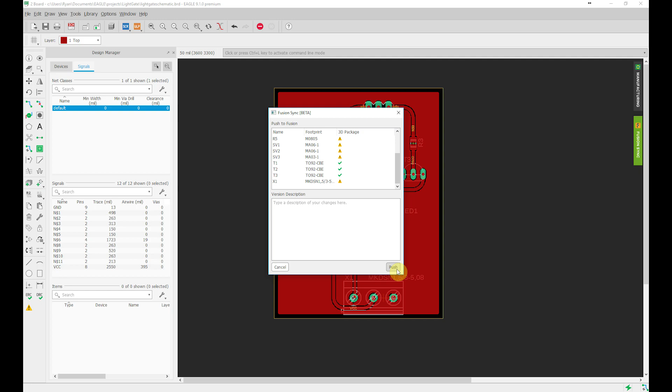Okay, so we'll start in Eagle, and for me, I've already exported this, so when I go over onto the right and click on Fusion Sync, it gives me these options of just simply pushing to Fusion. If you haven't done this yet, it'll ask you which folder within your Fusion folders you want to save it in. So just select that and then send it over.

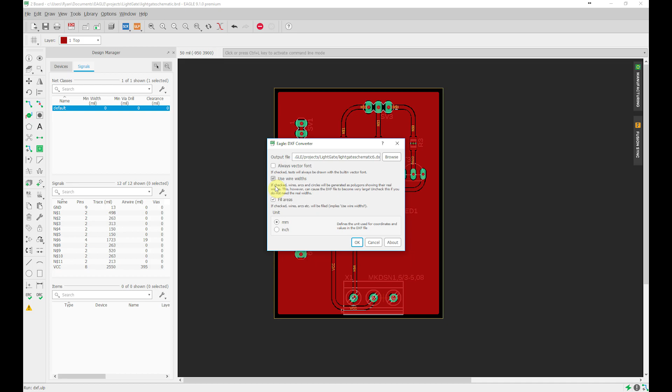And then there's one other step, which is go to File, Export, and the DXF. Take off the vector font and the fill areas, and OK. So those are the two things that we need to export.

Alright, so we get it open in Fusion, and you'll see the board is more or less populated already. This is pretty helpful if you want to design the rest of the, like the enclosure or other parts that you want to include with your design. For us, we just want to hide all of those components.

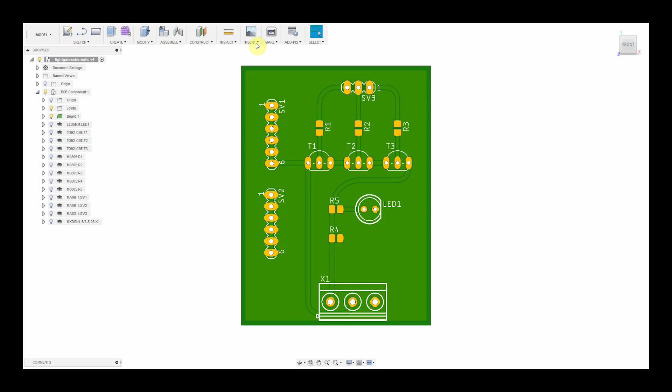Really, the only reason that we actually export the board itself is this gives us the holes. And the reason we exported DXF is it gives us the circuit. You see the circuit outlined here, but it's just an image, a rasterized image, so it's not going to allow you to pick out the paths themselves. That's what the DXF gives us. All right, so

we're going to put the DXF on top. So we go to Insert DXF, select our board, and select our DXF file, and then that'll take a little bit. And we want to take off all the different layers from Eagle that we don't need. In my case, I only need 1 and 17. And okay, this will take a minute.

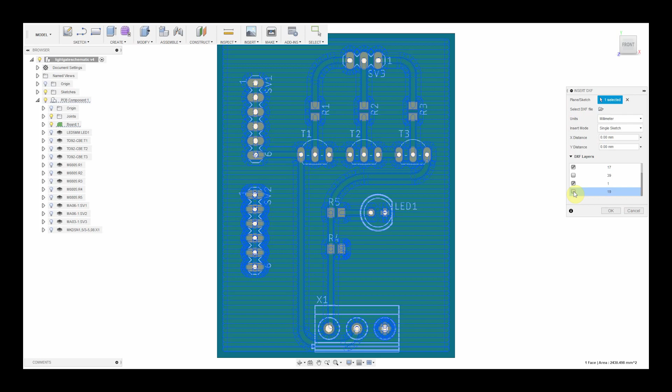All right, so now we have the circuit itself on top of our board, which you can see here. So what we want is the outline going around each of the different traces. And that's the path that we're actually going to cut out from our circuit board.

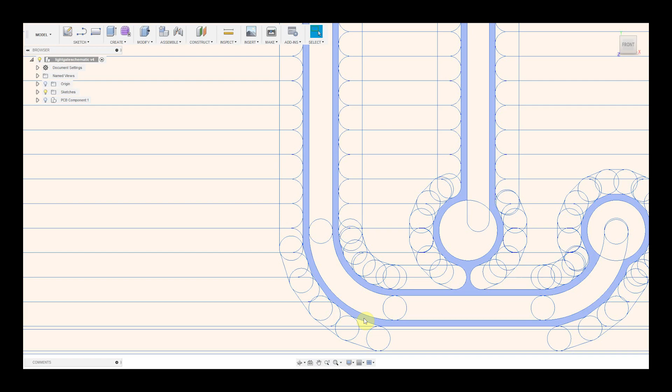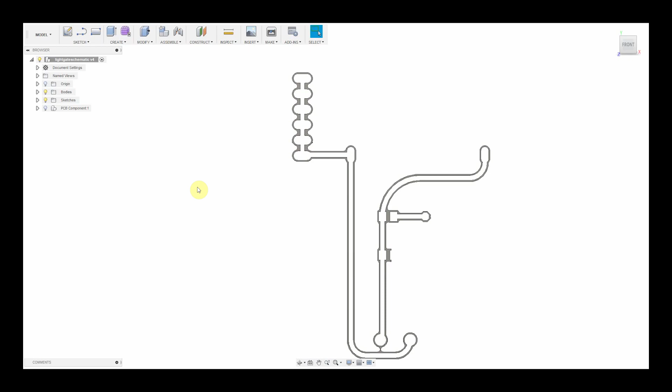So one thing you can do is just click on that path somewhere and extrude it. I'm going to extrude it negative because this is sitting on top of the board. Extrude it negative 0.1 inches. And that'll look like that. Alright, so then we just go through all the other components. This is a little bit tedious, so I'll speed it up.

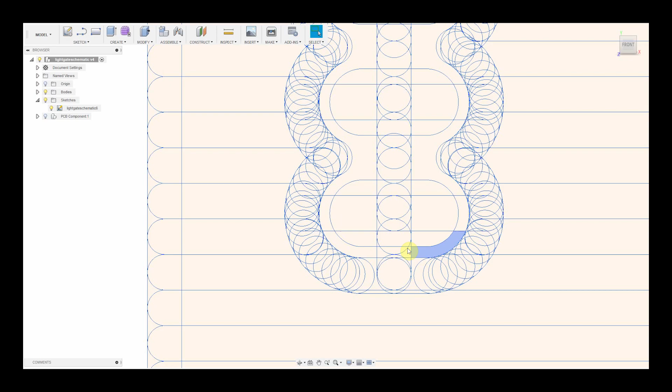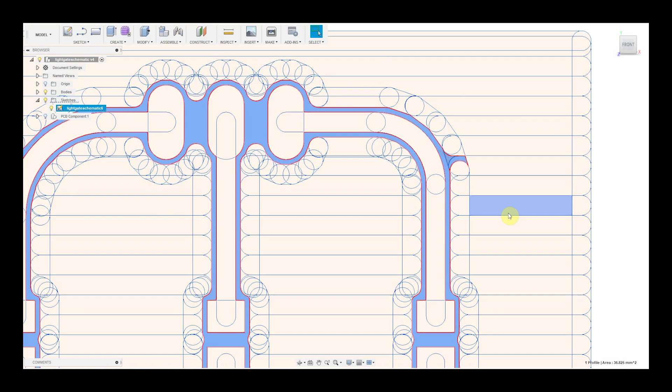One thing to notice, I'll stop here. So there's some bug, I don't know if it's in Eagle or in Fusion, that on occasion you'll get these, I don't know, there's areas that just don't work out right. So there's two ways you can deal with that. One is in the sketch workspace. If you just draw a line over those areas, that seems to sort of fix the bug. I don't know why, but that seems to fix it.

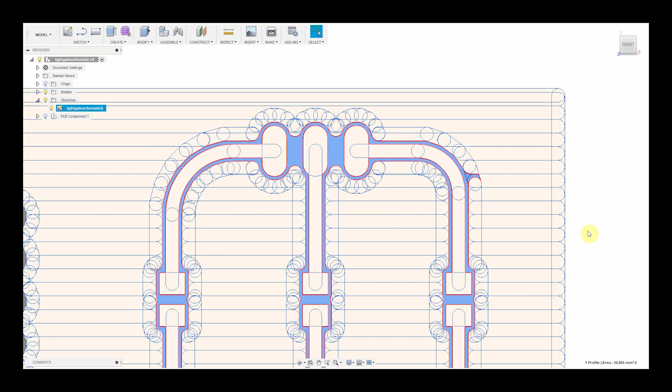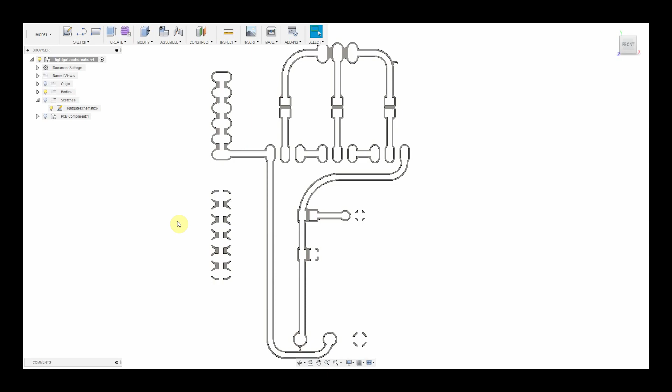If it's just a small one like this, there's another way to fix that. The problem with drawing a line over it is, in a lot of cases, it takes a long time actually. It takes maybe a couple minutes for every line that you draw. So there's a faster way, if you can deal with it, is just to continue as I'm doing here and extrude it as normal.

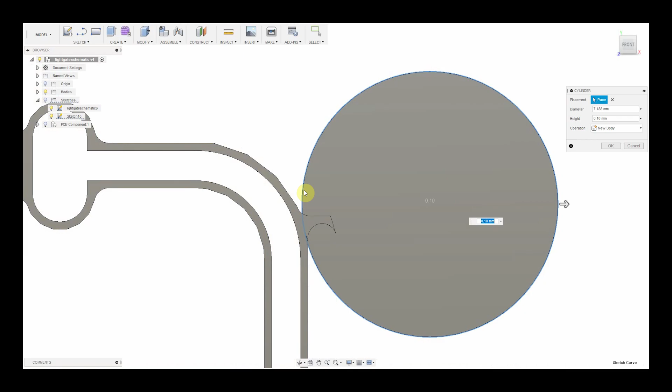So it all looks pretty good except for that one little spot, so we'll fix that. So I'll just draw a cylinder actually. And pull it through. Doesn't have to be exact. And just cut it. Alright, so that's close enough. That looks pretty good to me.

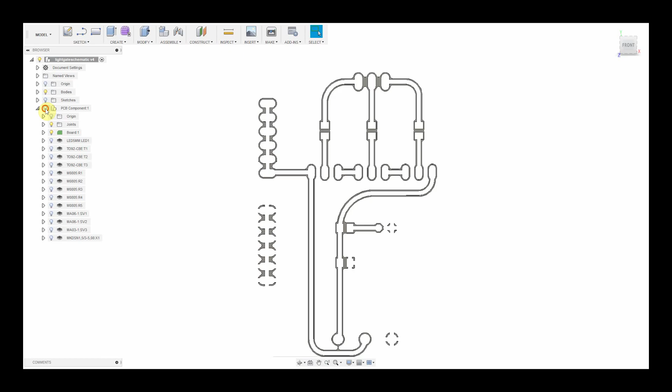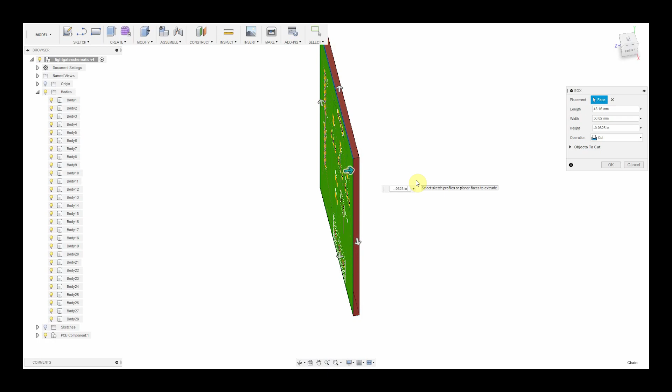Okay, so let's bring our board back. So the way we're going to do this is, because we only need the holes from the board that was exported directly, we'll just create another box that is the same dimensions as our board, and then do a combine and intersection to get the holes on our new circuit board.

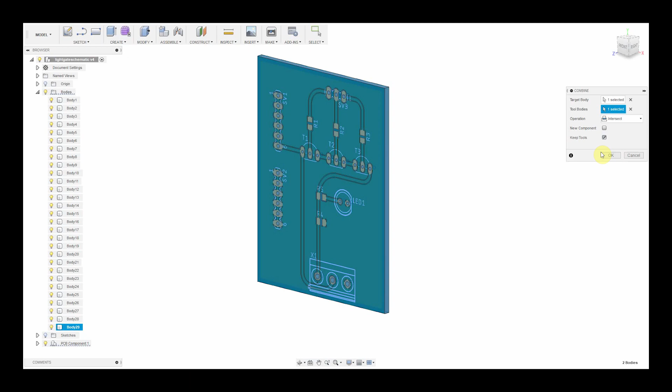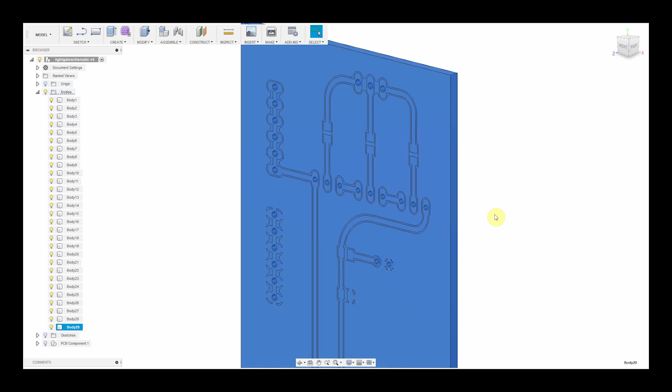So now I'll do the combine, intersection between our new box and the original board. And okay. Alright. So if we hide our board, we can see, so now we're looking at our board plus all of our extruded paths. You can just check it out, make sure it all looks alright.

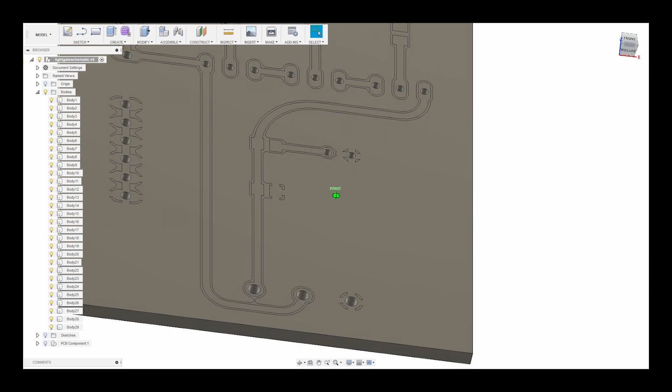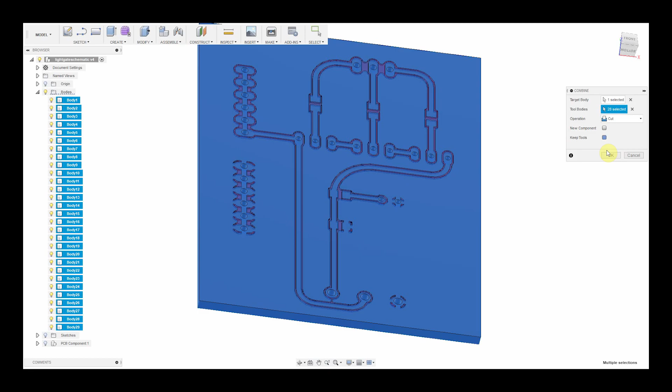Okay, so now we'll do a combine, select our board, and then select all our different paths, which is our circuit. Do a cut, and keep tools for now just in case we need them again. And click OK. Okay, and then we can just hide all those, so select them all and hit V. Alright, so now we should see more or less the circuit board that we want to cut out with CAM.

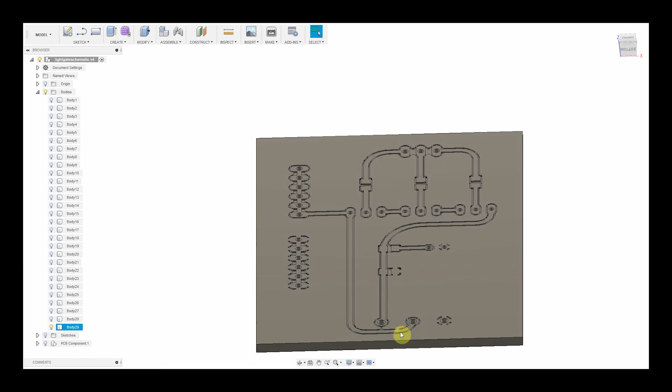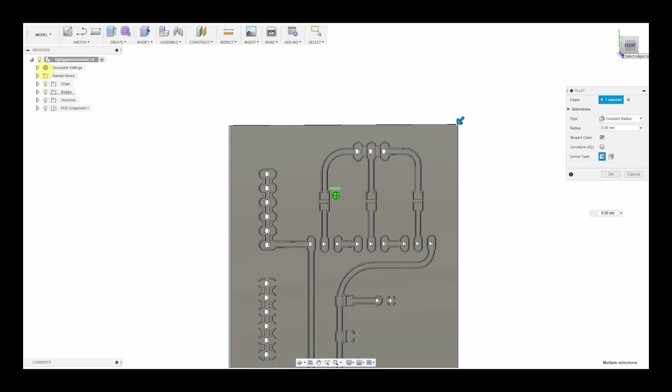One thing I'll do is add some fillets to the corners, just to make it look fancy. And let's go 2 millimeters. And let's do 3. Looks good.

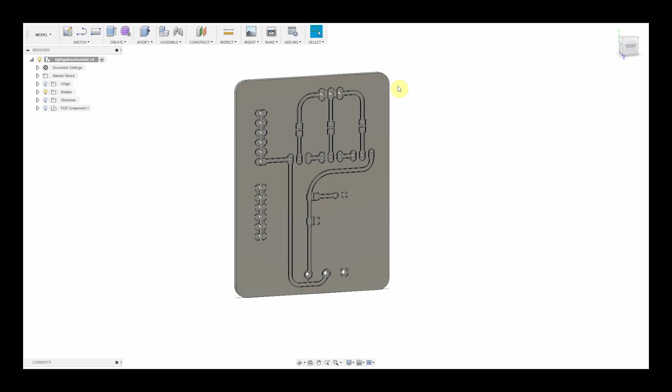Okay, now I missed recording this part of it. So to create the setup stock, I just created the stock to match the thickness of my board and to match the height and width of the actual board that I'll be cutting it out of. And then you can put the origin wherever you'd like. You can put it in the center as I'm showing here. Actually, what I did is I put it in the bottom left on the top corner. I mean the bottom left top for the front surface.

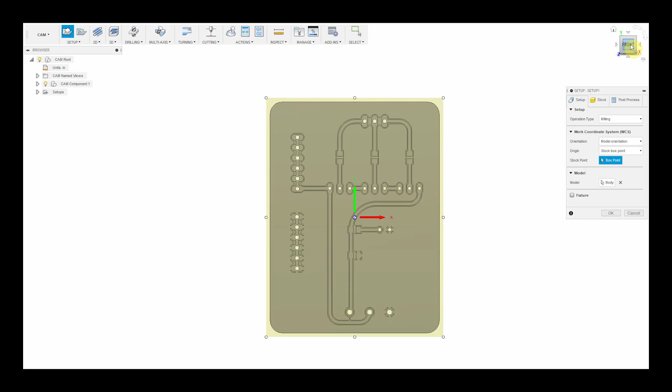What I'm doing here is check what the distances are, the thickness of the surround for your traces, and in my case it's 0.008 inches. So I'm using a V-shaped bit with a 60-degree included angle, and this is a little bit of a trick. Using the V-bit, the engraving bit, with Fusion is not so convenient. So what I do is I lie to Fusion and I tell them I'm using a square bit that's of a particular diameter.

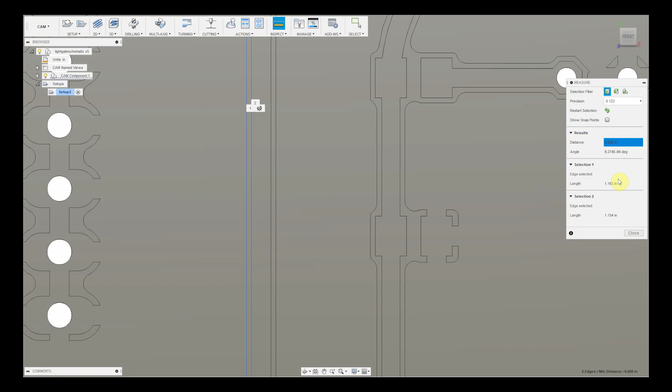And so, since the whole width of the cutout that I want to do is 0.008 inches, I'll say that my V-bit is actually a square bit that is like 0.006 inches. So I'll go make this tool. I'll call it my faux V-bit. With a flat end mill, just call it 2 flutes. And go 0.006 inches. And then just make the rest of it sort of look reasonable. Doesn't really matter.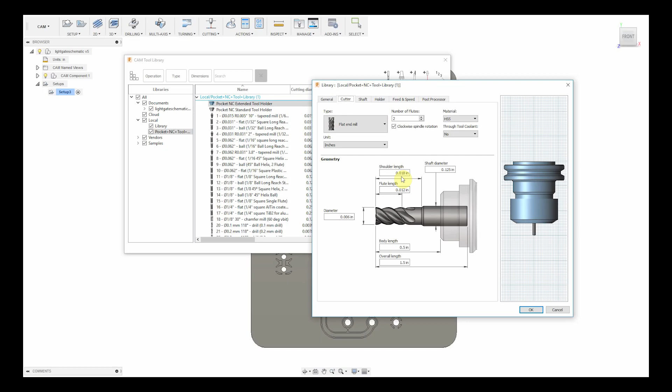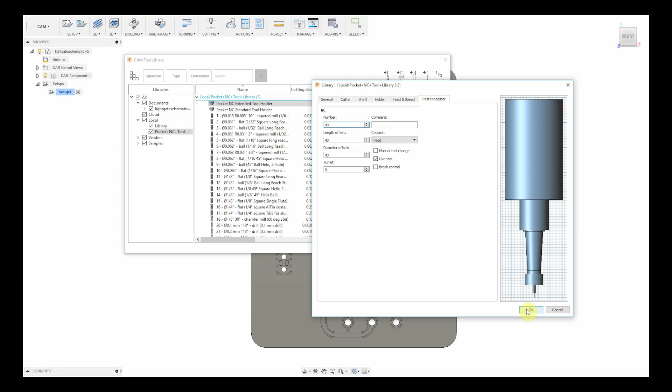And I'll call this tool 40. That's well away from all my real tools. Okay, that'll work. So now I'm going to go to 2D Pocket. I'll select that tool I just made, 40. I didn't set the speed, so I'll set that. That should work. Alright, and then we're going to select our paths.

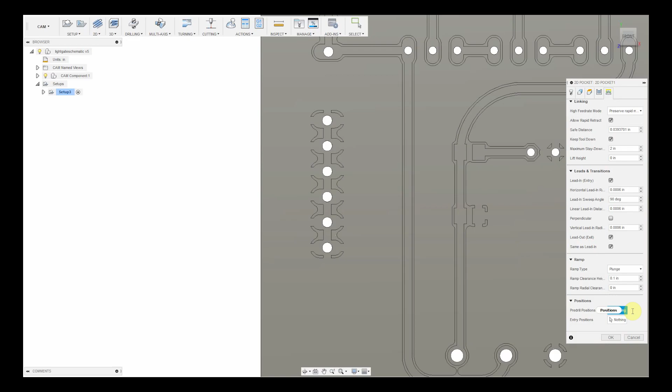So I'll just grab one pocket for now, just to make sure that everything is working. I'll come back and get the rest later. I set the heights lower just because, don't have to do that. Turn off stock to leave, and I'll go with plunge instead of helix. Okay, let's see if that worked. Alright, so that looks like it worked pretty well. It'll just go and make a little loop through my pocket. So now I'm going to check the warnings, so it looks fine. Then I'll add some more here. I'll speed this up for you.

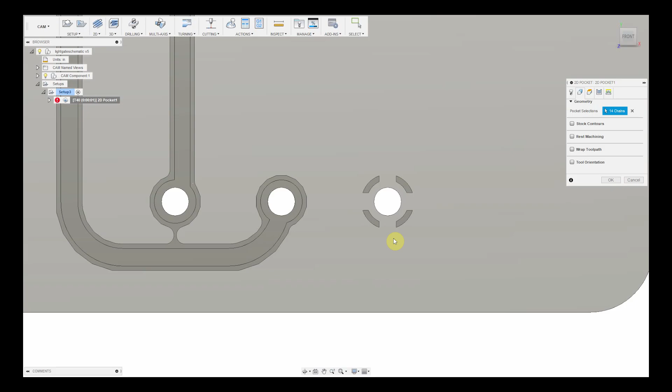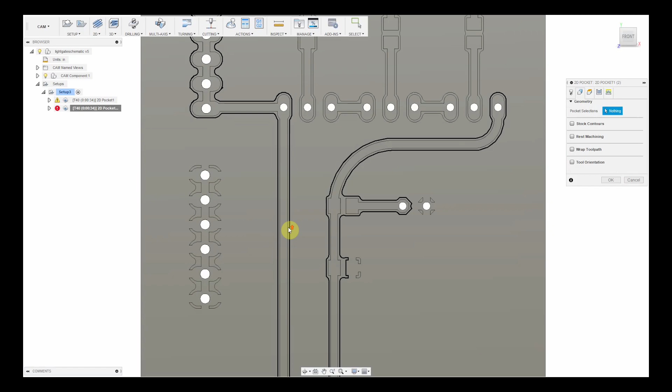Okay, looking good. So now I'll duplicate that so I don't have to redo everything, and just go and pick out different pockets this time. So I'll grab this guy. This will take a second. Okay, so this will happen sometimes. You see it's made the entire thing blue highlighted. That's not what it's supposed to look like. And I think that's related to the problem that I mentioned earlier in the CAD process, where I have these little glitches. It was in the top right of my board.

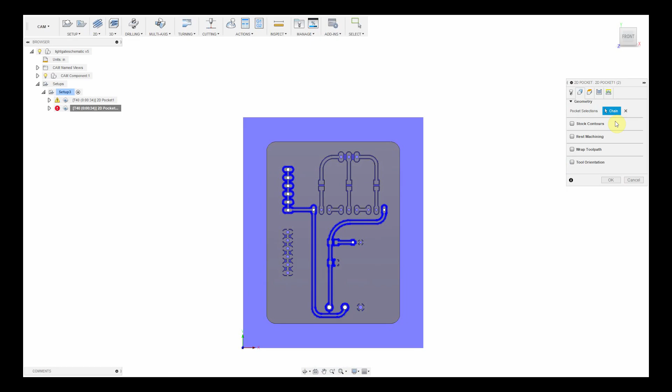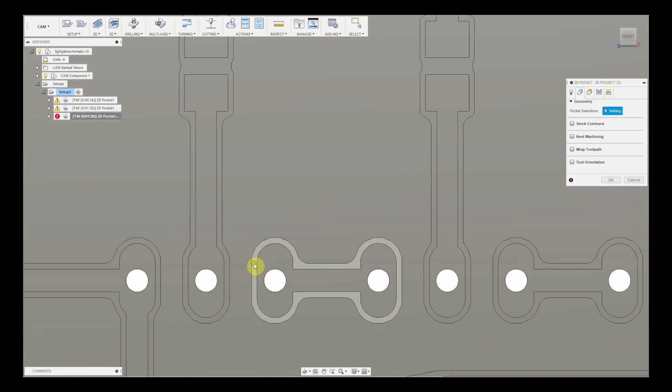When these happen, it's quite annoying, but if you see, when you click on the bottom of a pocket and it turns all blue like this, it's not going to work. So what you've got to do is cancel that and go back and select the edges. Select the outside edge first and then the inside edge, and that effectively does the same thing. Duplicate that and get these other ones. So sometimes you see it works fine, sometimes it doesn't. Okay, so let's simulate this and see what it looks like. Alright, those are looking good.

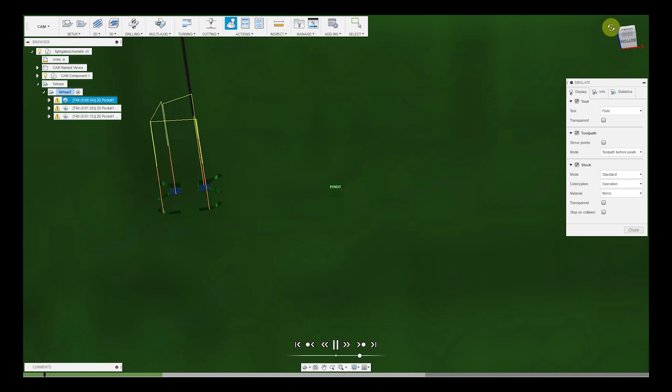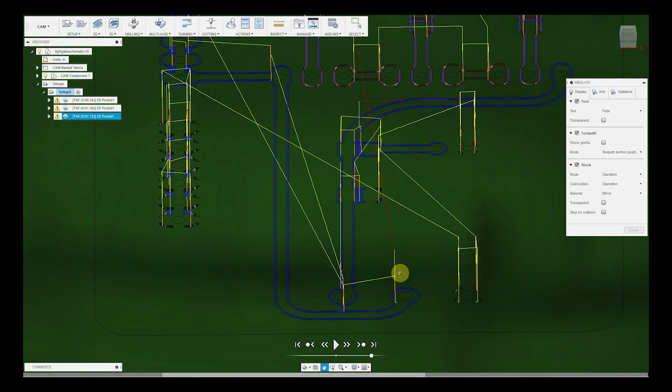Okay, now something's not right here. So you see it's actually the bottom of the path, the tool path, is on the top surface of the board. It's not digging in at all. So that was a mistake. So when I chose the chain for the pocket, what I accidentally did was I chose the top corner. You have to choose the bottom corner. So select the bottom outside corner first, and then the inside corners, and then it should work.

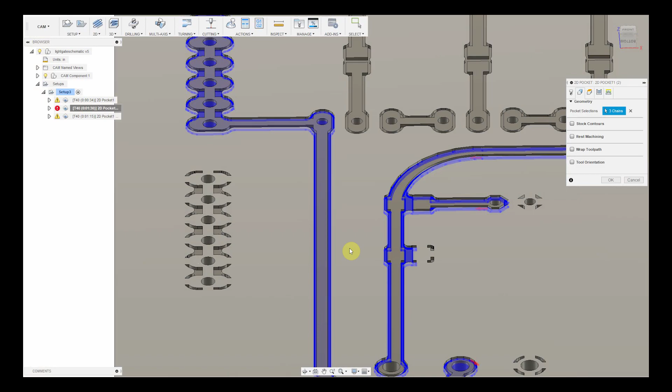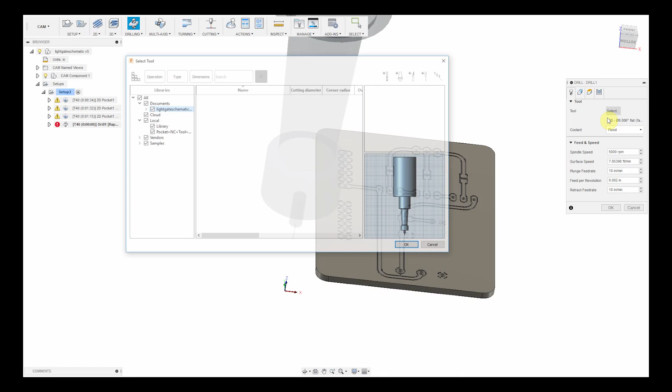Okay, let's simulate again, and that's looking better. Okay, so then I will just select my drills as normal. Select all my little holes. And these bottom 3 holes are actually a little different, so I'll grab my different tool.

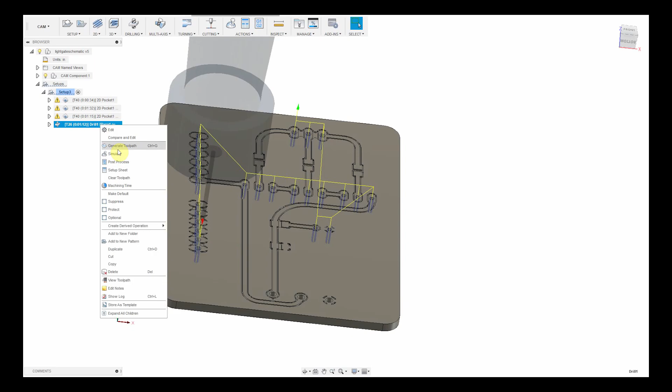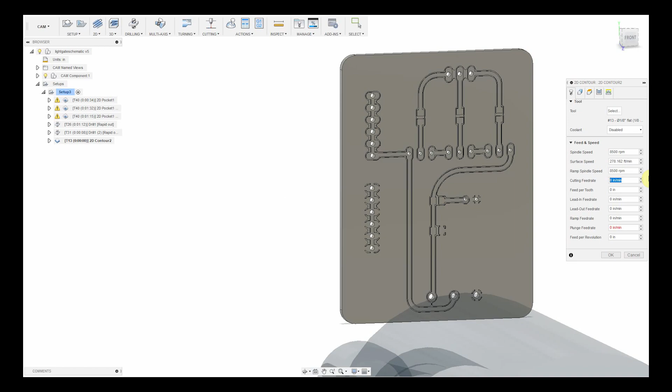Alright, and then I would do the cutout. So in here I selected some settings that are a little bit too aggressive. So this is with just an 1/8 inch square bit. I would recommend going with a cutting feed rate of 10 and a little bit less of a step down than I selected here. So I did 0.04. I actually in my final version did 0.035, I believe, and so that worked a little bit better. This is a little bit aggressive.

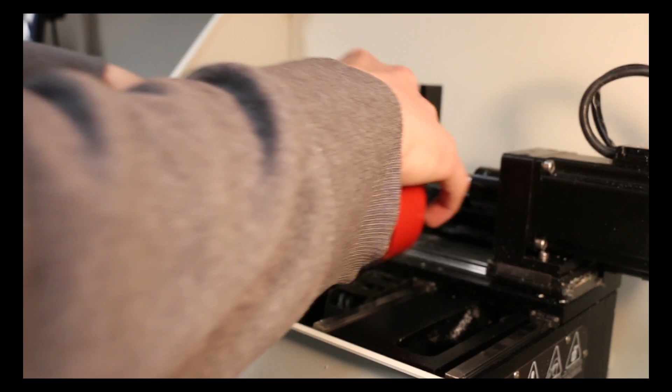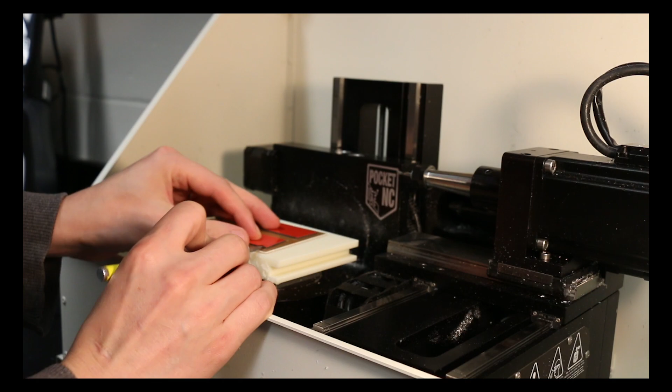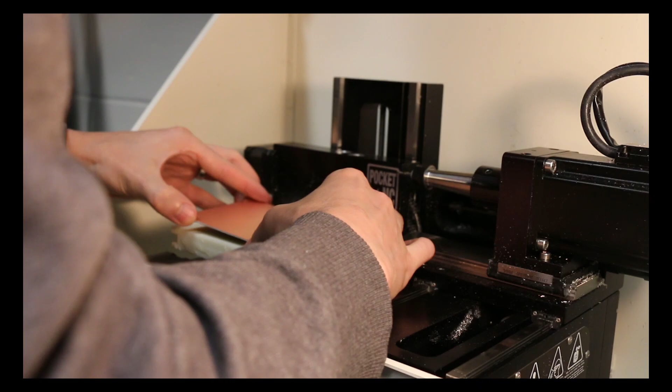Okay, so another not so simple thing to do is decide how you're going to hold your board. So I have this piece of 3D printed material that was just scrap from something I made a long time ago. So I use that as my sacrificial board, and I use double-sided tape, some 3M, pretty strong stuff, to hold that to my vise. So I tape that backing board down to the vise, and then I'm going to apply some of the same tape to the back of my board.

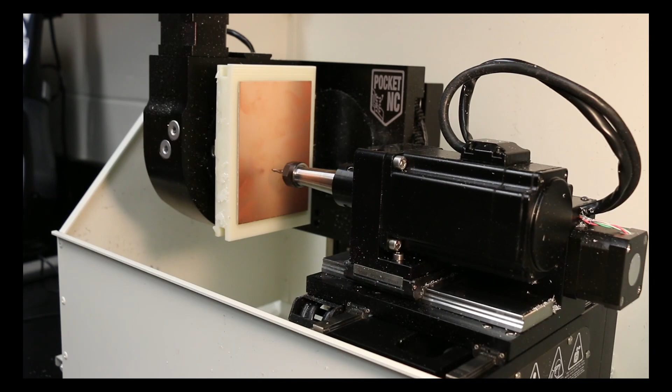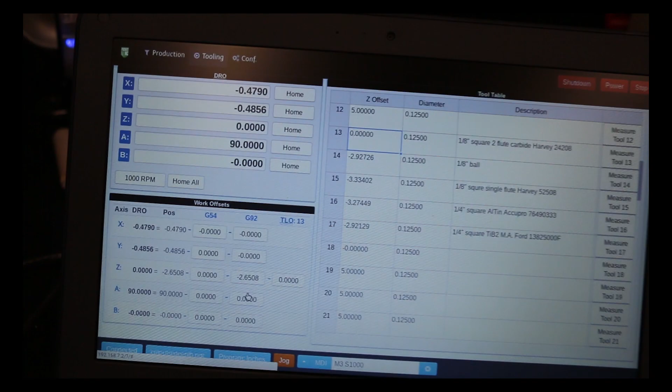Okay, so the first thing I'm going to do is turn on the spindle with M3 S1000, turn on 1000 RPM. And then I'm going to jog it over until it just touches the circuit board, and then I'm going to zero that out on the Z-axis. And then I'm going to go over to the bottom left corner. So again, this ties back to what you call the origin in your CAM.

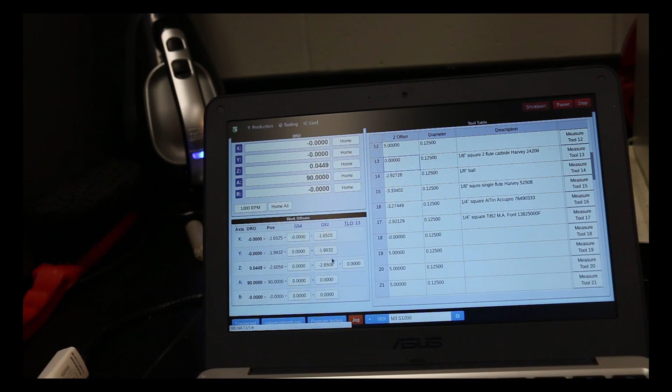In my case, I called the bottom left corner the origin, and so that's where I'm going to zero it out. If you decided to do like the top center, then you would go to that top center and zero it out there. But in my case, I'll go to the bottom left corner, and then 0 DRO for the X, 0 DRO for the Y, and also the A table, to keep it at that 90 degree that it's at right now.

Okay, and one other thing is make sure that your tool offset, the Z offset for your tool, is set at 0. Very important, otherwise it will not be anywhere near correct. Okay, start cutting.

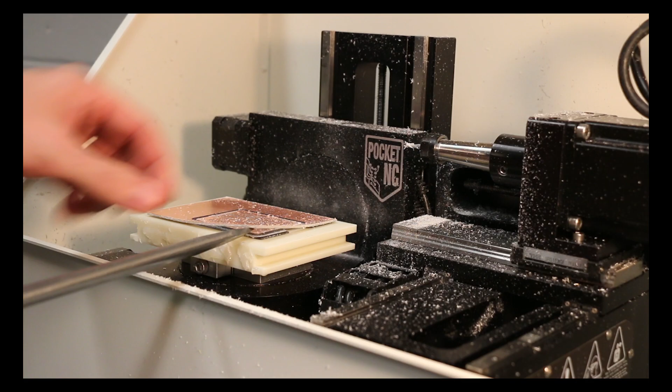The tools I'm using have the collar, and so that keeps the consistent depth. So once you've already set the Z depth on the first one, then you don't have to set the Z again. But this bit that I'm using to cut out doesn't have the collar, so I had to redo the Z offset and set that back to 0 for the offset and the DRO. So that's one reason it's nice, if you have all bits with collars, then it's a lot more convenient for this process. Okay, and the finished product.